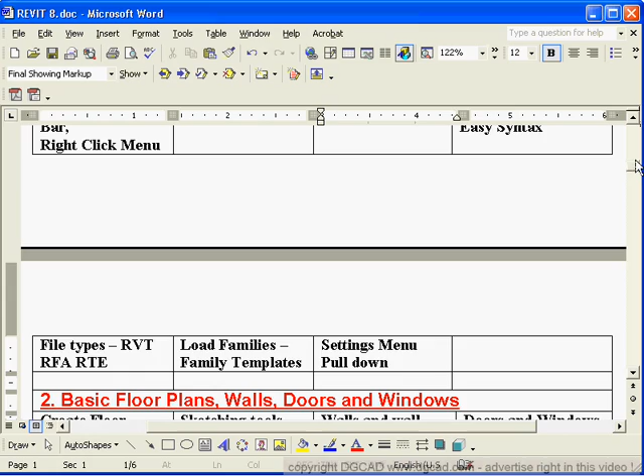So we're right down to our grids, and I'm just throwing the help menu in on this one. We have to put this in with one of our videos, so we'll just include it with our grids.

Grids are vertical datums, and they are three-dimensional, and they just cut vertically up and down, and objects lock to the grids just like they lock to our levels. Then we control them, and we use dimensions to dimension between our grids and lock the dimensions, and then the grids will tie in and be constrained accordingly.

We can also import a CAD file from another package such as AutoCAD or a DWG or a DGN format, DXF, and then we can use that geometry to create our own grids. And then we'll be talking about the help menu.

We'll talk a little bit about columns, but mainly columns will be covered in our structural section down in our next section, which is columns, beams, braces, and down in there.

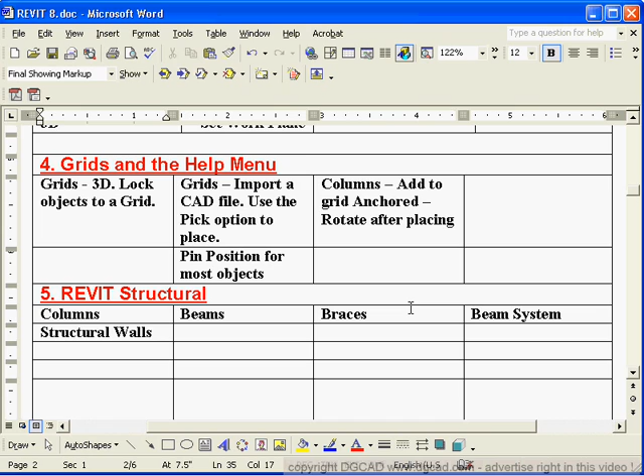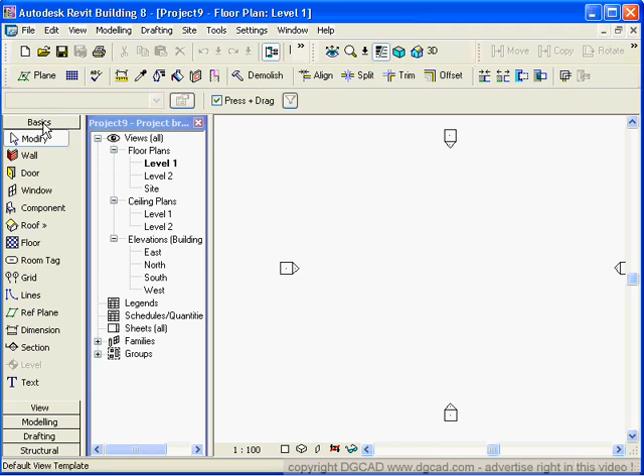So back in our ADT or in our Revit, we'll go into here, and I'm going to go File, New, and we'll start a new project and just use our basic template file. And we're going to go to our basic design bar over here, and we're just going to start to draw some grid lines.

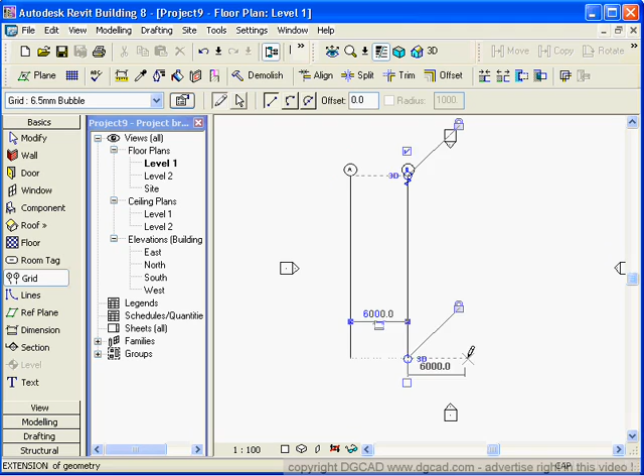So I'm just going to pick some grid lines, and the size of the bubbles and everything will be according to our scale. So I can click on there, and if I want, I can go right off the bat inside there and type in a character like an A, and then hit enter and come out, and that'll put an A in there. And now this grid line here will be a B, and that will be a C.

And then I can start this way, for instance. Notice I hit escape once to get out, and I stay within. This is what we call persistent commands, where you stay in that same command all the time. Even though you escape once, you're still drawing grids.

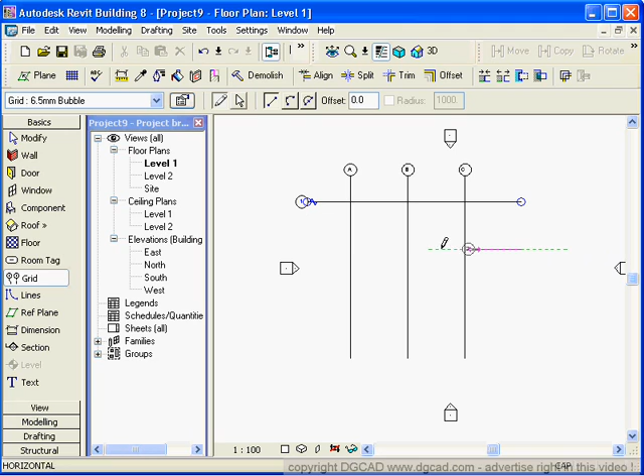Now I'm going to place that grid, and then I'm going to put the number 1 in there, and then this will be number 2, number 3, and number 4.

So you can very quickly get your grid lines in there, and then once they're in, you can click on them, and then you can grab this and you can pull it. Usually grid lines all kind of talk to each other with the ends, unless you take this lock off here. This is locking it to there. If I take this lock off, then I can move that off.

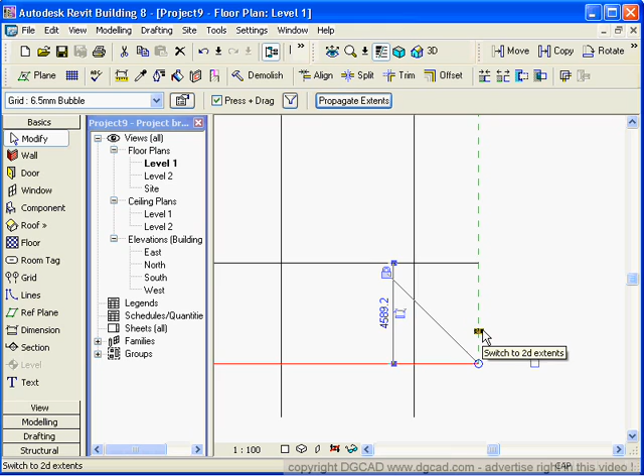The 3D means the grid line is changing in 3 dimensions. So you'll notice everywhere that grid line shows up, if you take the 3D off, it goes to 2D. Then what happens is the change you make is only for this particular view. So sometimes you want your grid lines to behave differently in each view, and that's where you would go maybe to a 2D where you can control it independently rather than globally.

Once you have your grid lines in there, you can quickly go in and just click on here, and each dimension you touch, and then you click nowhere, and then it places the dimension. If you click on the lock after you do any dimension and you grab an object and drag it, then of course it's going to move out with it.

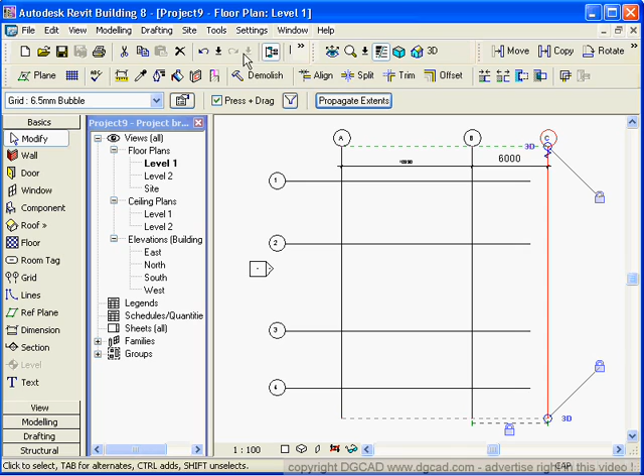So that's the idea of locking that, and then because these ends are locked, this would go this way. If you put a further dimension from the end point of here, that would stretch that out. So now we can put some more dimensions, same type of thing on here.

Place those, and then maybe we want to lock them all. Okay, that might not be a bad idea. Click on here, do the same thing. Grids are always locked, so that's it. They all kind of move together and in each direction.

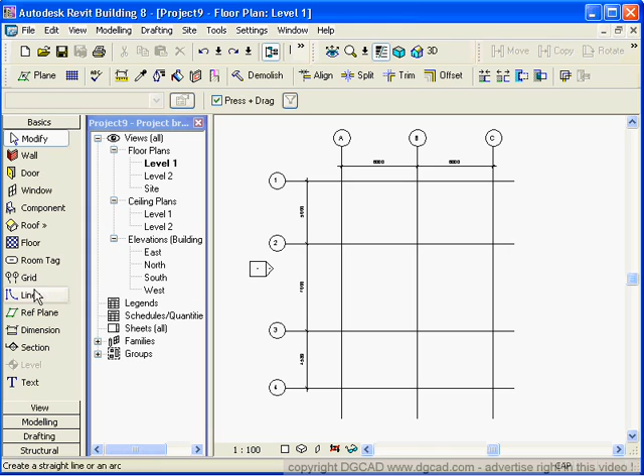Now grids can also be angled. I can go in and click on a grid command, pick a point here, and then I can add grid lines in at whatever angle I want.

Hit escape, click on the grid, and then I can grab my grip on the end here, grab all these grips on the end, pull them out. I can grab these and pull them out to here if I want.

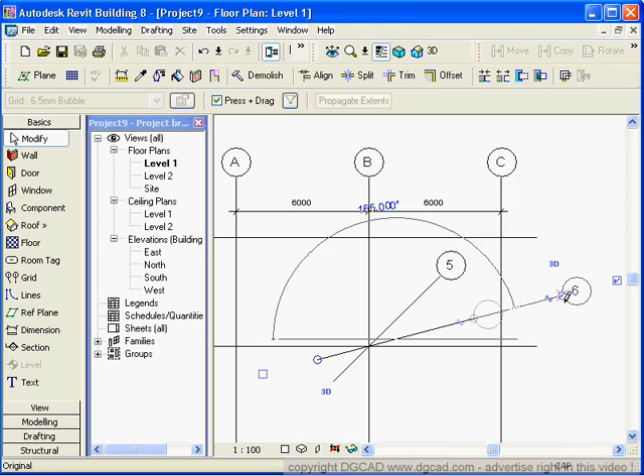You can also go up to a grid and click on it, hit the break button, and then move these things around. If I grab this grip, it's still moving those grid lines up and down. Notice the dimensions are moving with it, and if I click this and bring it back, then my grid line gets back into one piece.

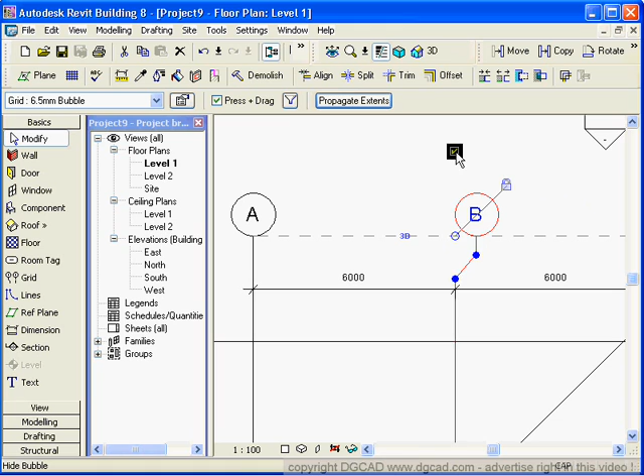Click on here again. So you've got your different grip points. If you don't want the bubble here, you can click on here and it just gets rid of the bubble. Or I can go down here and put my grid bubble down on this side.

Notice that my grid lines are solid lines instead of dashed or centered lines, and that's because of the property of the grid. I'm going to click on the property inside of here and go in. You can see there's the grid bubble it's using, there's the grid name I could change, and I'm going to go in here and say, not a solid line, which is a continuous line. We want a center line inside of there, okay?

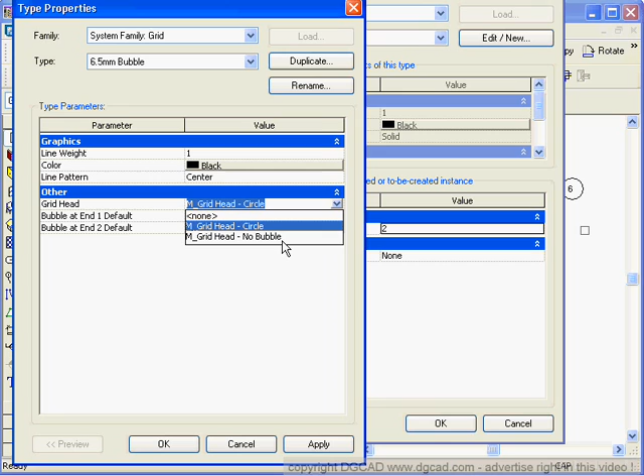And then the grid bubble at both ends or not - seen that inside there. And then there is the grid bubble, we use it, or we can say no bubble if we want, and we can go load some as well, more content inside of there. So then we can hit OK and OK.

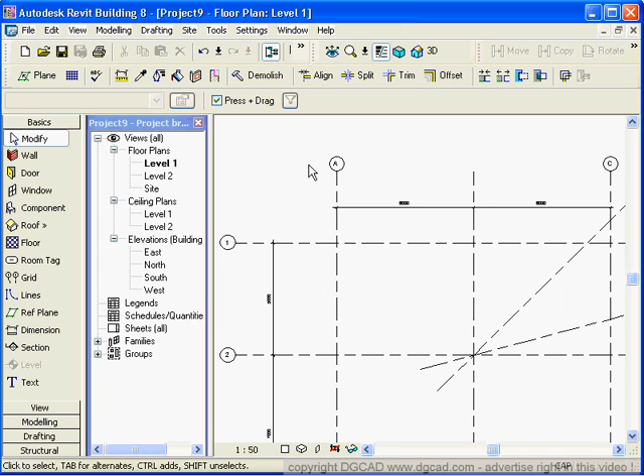And then what happens now is our center lines are going to be there, and if we change our display to be 1 to 50, our center lines will change, and our grid bubbles and dimensions will also all update. So that's one of the nice things with this - the scale and size of our objects.

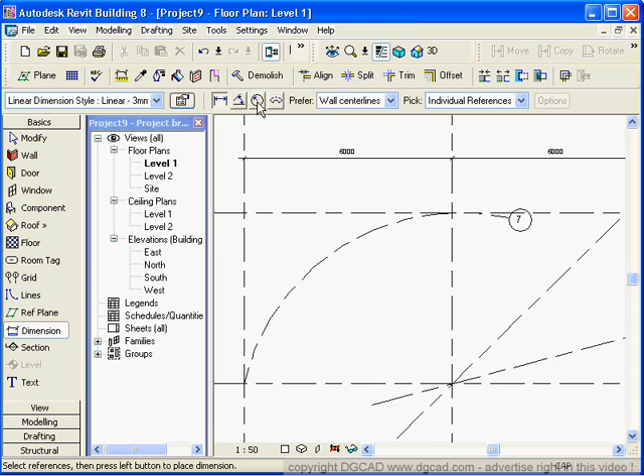We can also go in and do a grid line that is an arc as well. We can do a grid line from here to here, and we can arc that out as we please. Then you just basically have an arced grid line, and you can drag that around, do whatever you want with it, and you can dimension that as you please by clicking on here, putting a dimension in there quite nicely, and then locking that if you want, and of course moving that in or out. We'll change that radius, or move the arc.

Now we can also import a CAD file and use that line work. If we happen to have walls in this drawing already, it doesn't matter if the walls are in or if we import the information, but we can go in here and pick grid. Instead of drawing a grid line, we pick select, and then that will actually put a grid line in right on the line that we want.

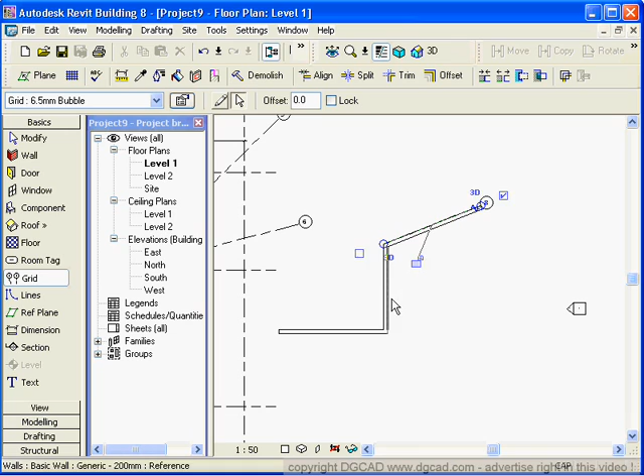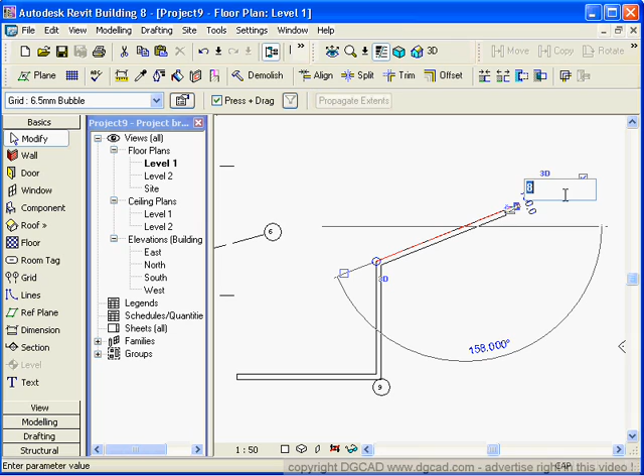Maybe we want our grid bubbles there and not in there. Now I can click on this - I'm going to use my tab button to cycle between the objects. When objects are on top of each other, you tab until you get the one you want, then you click it, then I can go in and grab this grip and pull that grid line out. Again, if I change my number here, it'll change the subsequent numbers, like all Revit tags.

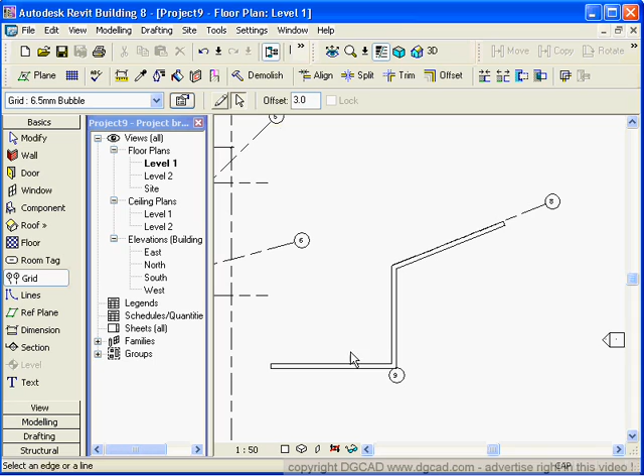So we can go in and do line work by clicking on objects this way and adding our grid lines by going to this option, and we can also offset it by a number. For instance, I can offset it by 300 and then click on here. It's not doing my 300... there's my 300 there, so there's my grid lines offsetting by a certain distance as I pick the points.

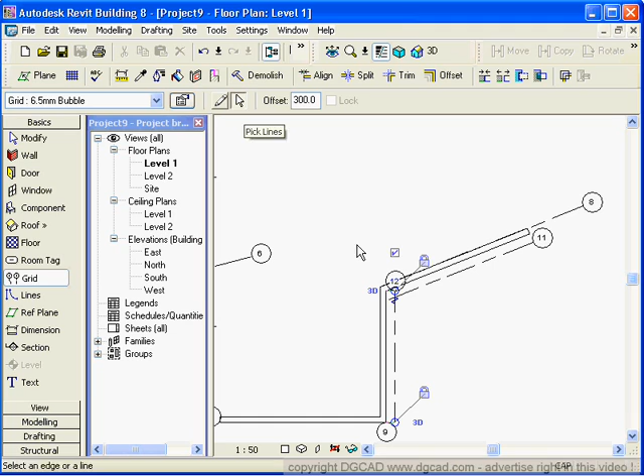Whenever you see these two options, you know that it's either draw a line or select the object. Quite often people overlook this one - it's underused, and you can use that to do a lot of stuff.

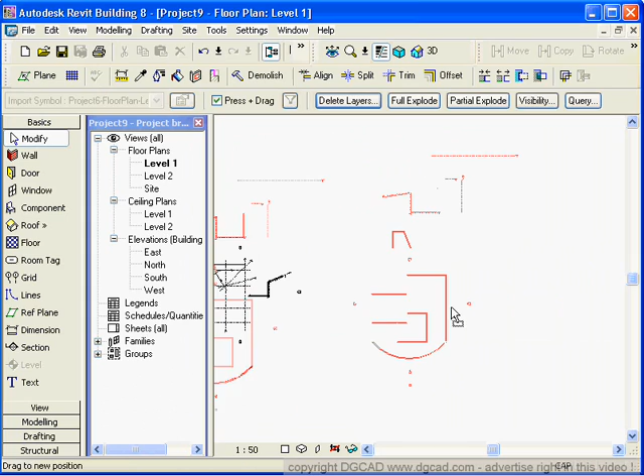So for instance, I'm going to import an AutoCAD file. I'm just going to import a DWG file, and pick a file that I have there. It's just a sketch, it's got some line work on it. And that file I just imported is right there. So I'm going to take that file and just kind of move it over there. I can take this AutoCAD file and delete layers from there.

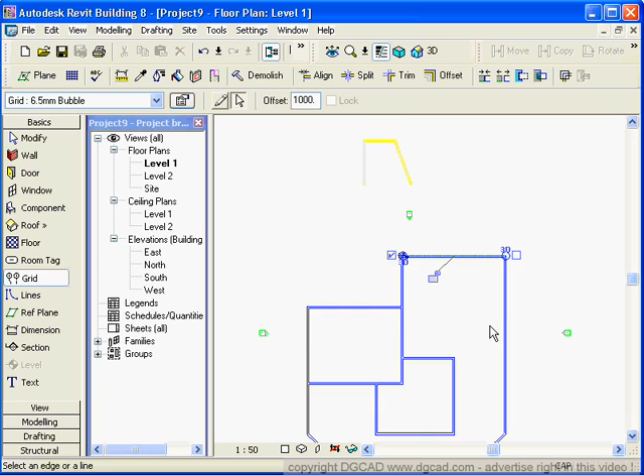I can do a full explode and explode it into line work, or I can explode it partially, saving some blocks. But for the most part, all I'm going to do now is use it to draw my grid lines, because I can grid line and snap to that AutoCAD geometry, or I can use this command which we saw earlier, click on there and maybe do some offsets of 1,000, so it gives me a bit of room off of my object, and we can go around, and even the arcs we can do.

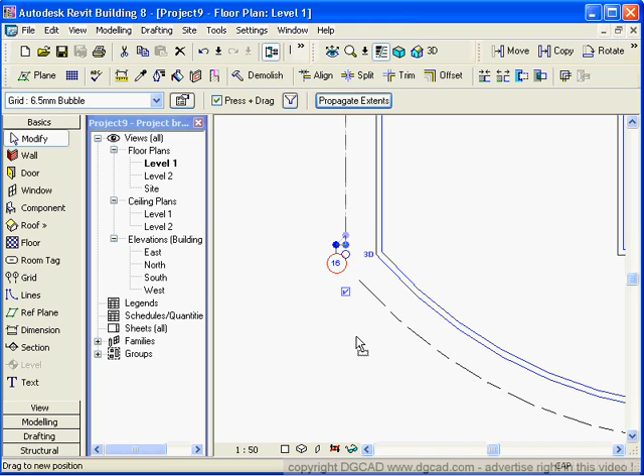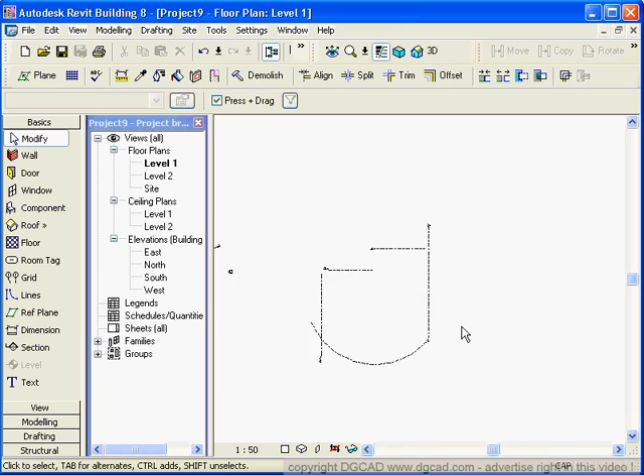Okay, so I can click on there, and then after I get that in, I can grab this grid line. Oh, I hit the break button there, and I can stretch that down. Keep grabbing the wrong grid number, the grid grips. Okay, so once I have that in there, it's just a matter of gripping those, stretching those grid lines off, and then once I get those grid lines on there from this existing CAD file, I can click on here and simply delete it, and I've ended up with my grid, and then I can use my grips to do whatever I want with that.

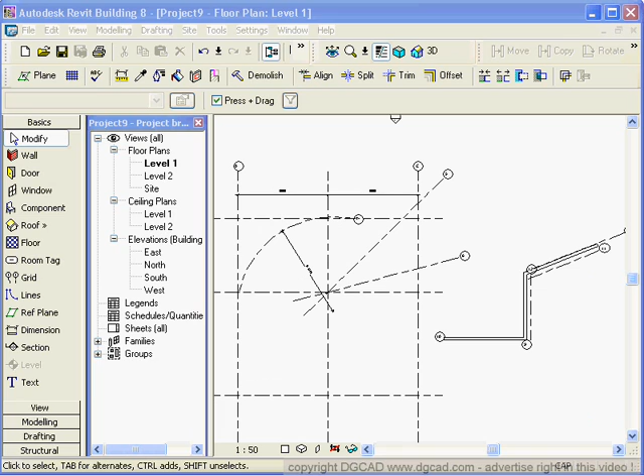So using imported geometry to do your grids as well as line work. And just doing a little cleanup here, get rid of some of this stuff. And of course, when we look in our sections and our elevations, we will also see our grid lines, and again with our 3D grid, grip and stretch that. So elevations and sections and plans all showing our grids.

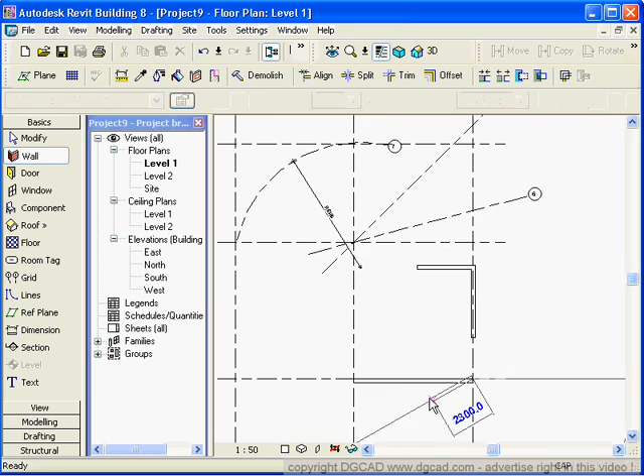And then of course when we draw our objects and we draw our walls, we place those on there, and then we would lock those as we place that wall right on the grid. And again, when we place our wall, remember you can pick the surface that you want that wall on, and then you would just align that and lock it, and then your grid would do all your control.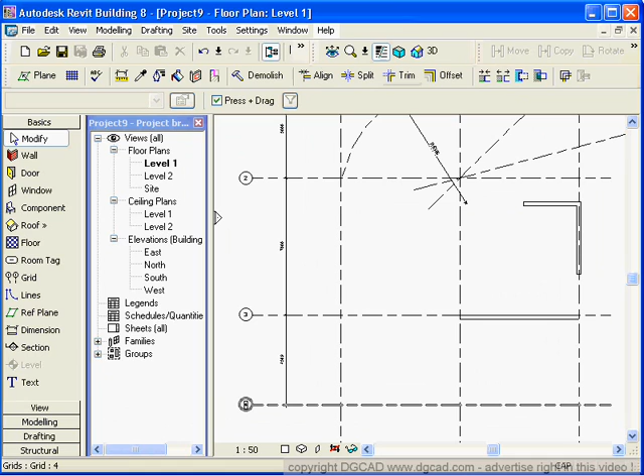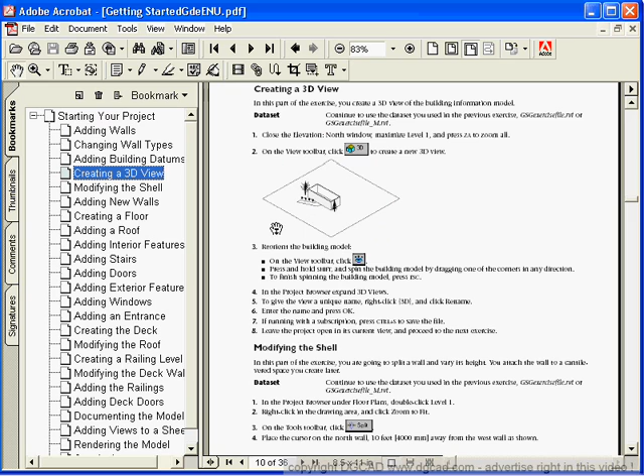So just to finish off here a little bit on the help menu, when you click on help, there's some really good information on obviously the F1 button in the main help, but there's a very good document called Getting Started, and quite often we get people who want to follow up this training with a hard copy or some documentation of this training. And if you go into here and click on the Getting Started, it will bring up a PDF document, and inside of here it's got some really good information where you can follow up and supplement this training video with reading through this document and some of the tutorials and information.

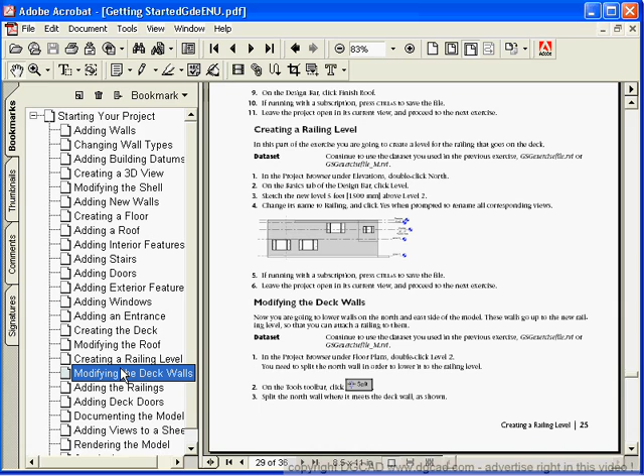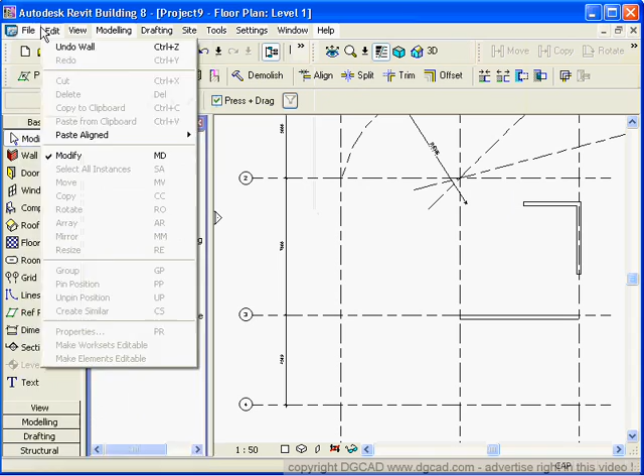Very valuable documentation here on pretty much everything I'm going to be covering here, and you can view it however you want as a PDF document. So we've got that Getting Started. We've got some actual tutorials that you can open up and follow through, and it will use the same tutorial files that I've been using here, as in when you go File and hit Open, and then use the training files folder shortcut on the left. And then there's some really good documents on the web, and some great websites that you can also get Revit information from.

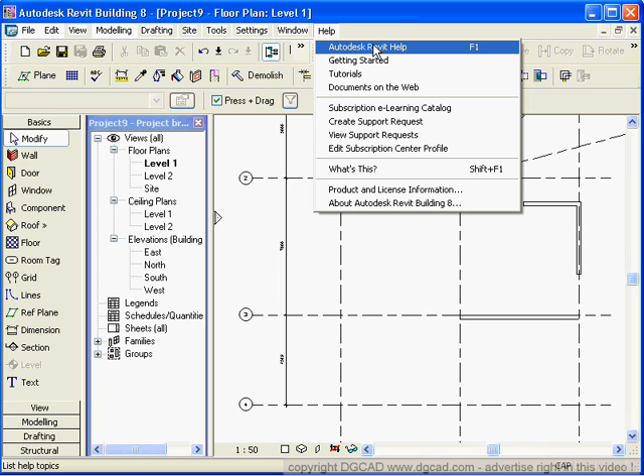So when we go into the Revit Help menu, we can just go into the regular Revit Help, and in particular we're looking at grids right now. So I'm going to go to Index and type in grid, and then we have the grid commands and adding grids and the shapes and changing and using grids. There's some interesting information about display control of grids and how it relates to a scope box. So something you might also want to supplement your grid training with is to go through this help menu into the scope box or into the grids under display, and read up on these topics and how this particular object type, scope box, affects the visibility of datum planes, being grids, reference planes and level lines.

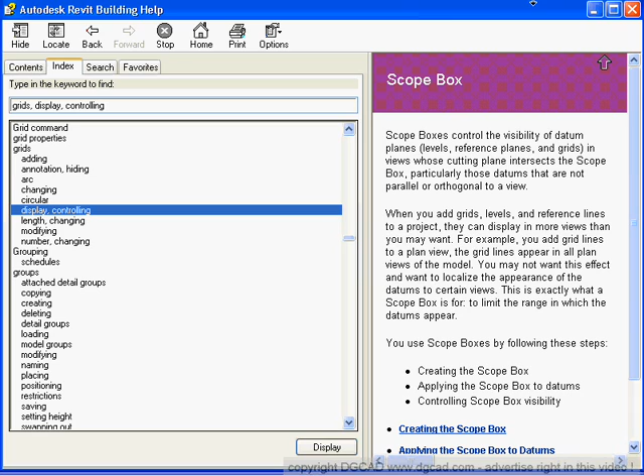And in general, the Revit Help menu and help facilities here are second to none. So do take the time to go through all of the documentation in here, available with some great diagrams and animations explaining the program.